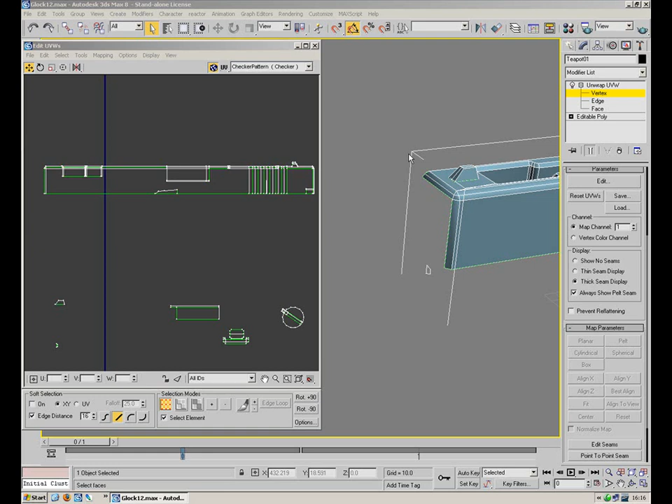So I'm just going to carry on from the last tutorial and finish off unwrapping this guy, hopefully. It's one of those annoying little projecty things you have to do. It always seems to take a lot longer than you expect.

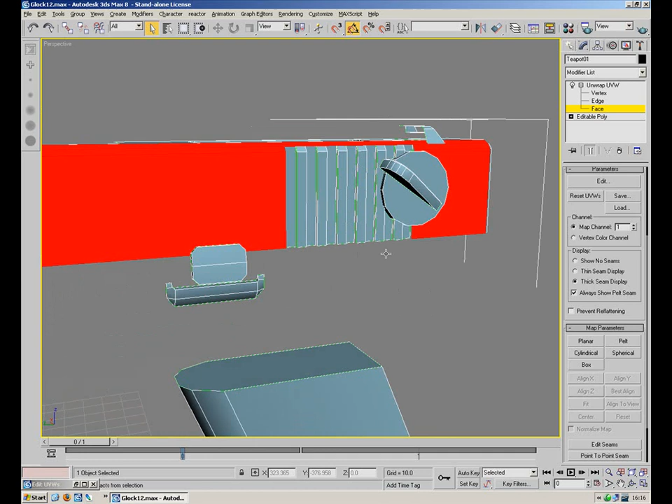I'm going to carry on unwrapping, starting by getting the slide out of the way. So I'm just going to select all the polygons down this side, and you guessed it, a planar map along the x-axis. You see I've missed out the little grippy section there.

I'm going to try and unwrap the actual main part of it first. Planar, we want Z, I believe. Going to need to rotate anti-clockwise 90 degrees.

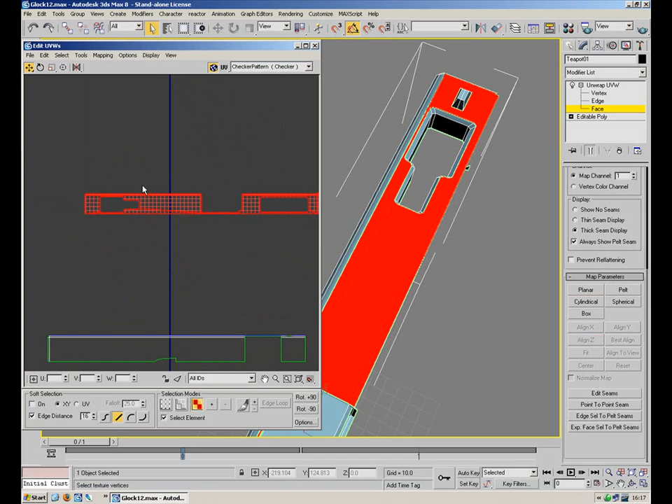Select this edge along the top, or the edges along the top, and we're going to do the stitch. Okay, we just need to do the front and back now, really. What are these guys doing?

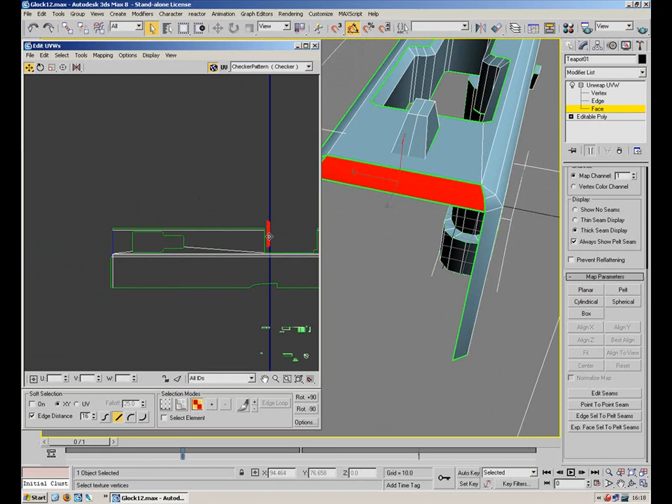Planar, Z-axis as well. We want to rotate 90 degrees and just bung these on the top, the front here where they're meant to go. Tool, stitch. Yes. Last but not least, we just want to do this small section on the back here.

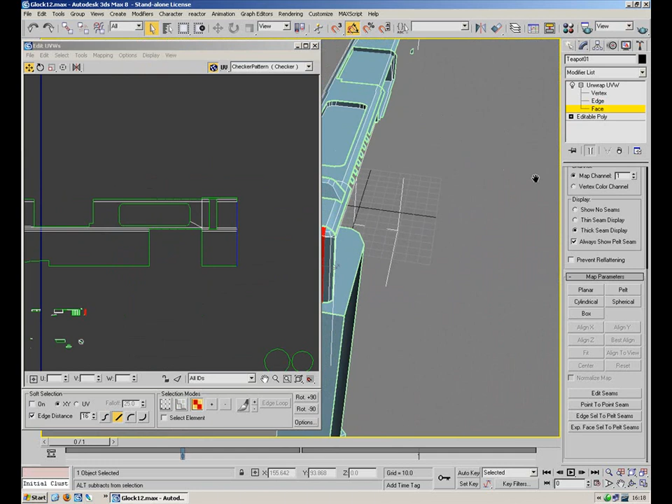I've always been a bit annoyed with Max that it doesn't have a hide polygon tool inside the actual UV map editor, because it's a right pain in the bum seeing what you have and haven't unwrapped. It's silly, really. The best thing would be to unwrap something, hide it, unwrap something, hide it, but my lovely friends at Autodesk don't seem to want to add that feature.

So I've just unwrapped that section at the back with another planar map and attached it on. That's sort of the main section there.

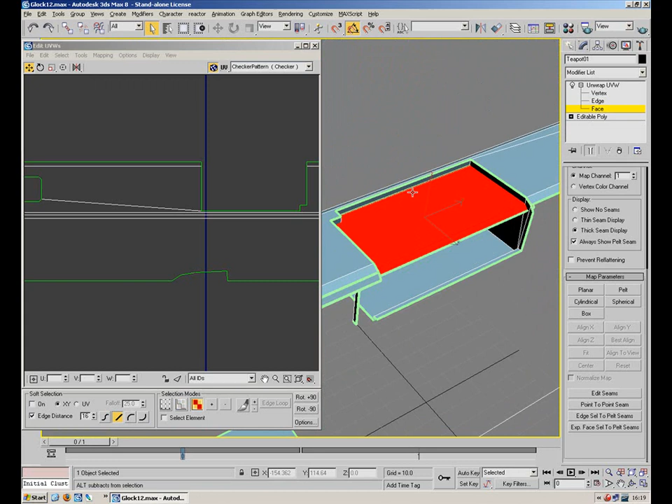I think I'll probably get this. Kind of lost where I am, I just had a phone call. I think I was just unwrapping this little section at the top, wasn't I? So I'll just carry on with that.

To be honest, by now I'm hoping you probably know what to do. It's all just a matter of planar maps, planar map this, planar map that. There's that last little section in there.

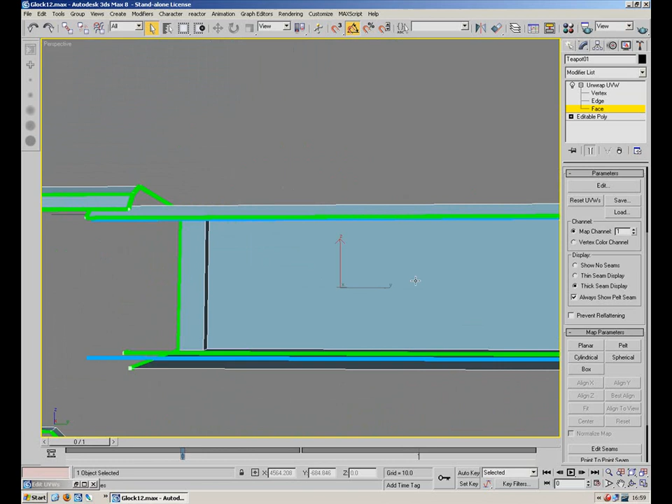Yes, that is the right edge. Right. I'm trying to figure out what's the top and what's bottom. That's the top. I'm going to rotate this like so.

Sometimes it can be quite hard to tell what you have and haven't got selected, but I generally use the viewport. You get your little XYZ gizmo there. I'll select these two verts, move over here, so I'm guessing it's those two verts rather than those two verts. So it's these two sections that line up over here.

I'm not going to attach them together or anything because they're not attached. I'm just going to go through and unwrap this last little section.

Also going to save it quick because, as I said before, it's not nice having to re-unwrap things. I'm sure there's a lot of people out there that know how to unwrap and know what I mean. When things break, having to start this boring process again, you want to pull out your hair, cry like a girl, throw your computer out the window, smash it with a hammer, and say grrr, grrr. Shit.

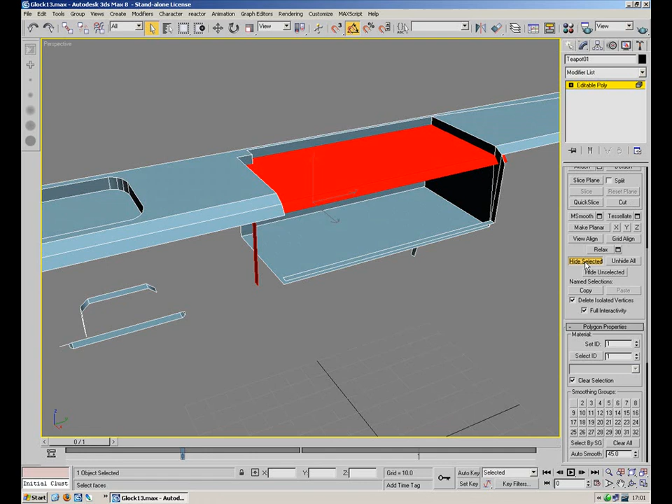Right. What I want to do is just get rid of this little section. So I'm going to collapse, select this element, hide selected, which gives me better access to this small inside section. Select them on the unwrap modifier once again, and just get going, getting this section out of the way.

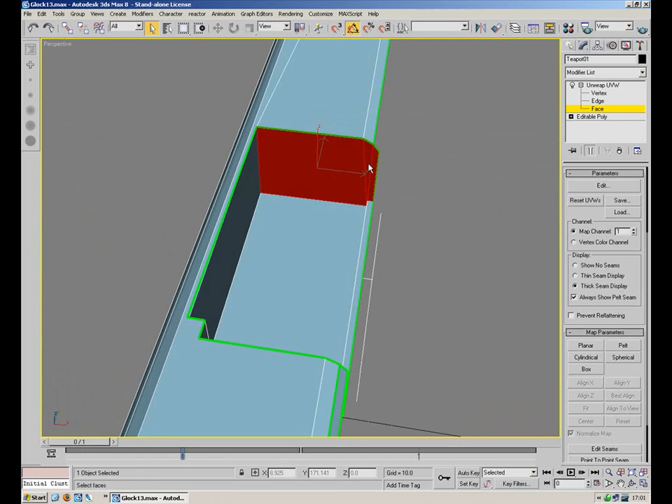Oh, forgot to turn off the normalised map.

So yeah, I'm just doing exactly what I've been doing the whole time, just going through, unwrapping every little section bit by bit. And I'm going to carry on doing that till every little bit has been unwrapped. Every little bit.

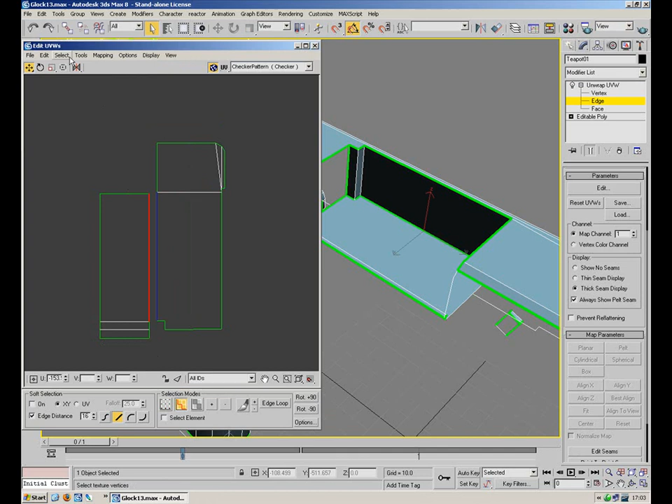I'm really trying to half rush through this now because I think you've had a good idea, but I don't really want to skip anything out in these tutorials. The whole idea is that I was going to do everything from start to finish and let people watch, because I'm sure there's a lot of people out there that know how to unwrap and who are sitting watching this thinking I'm doing it all wrong or absolutely bored out of their nuts. But I also know there's probably quite a lot of people that don't know how to do this and are perhaps learning something.

But where's that going? I'm hoping that if you do know how to do this, you're probably not sitting watching it, you've probably skipped on to another tutorial, and therefore probably wouldn't have heard me say that. But if you are a noob at unwrapping, I hope you're getting a bit of insight into how it's done.

This is to say you can see why it's quite good deleting half of your geometry, because you only really have to unwrap half as much, which of course saves you quite a fair bit of time, because as you can see this takes quite a while to do.

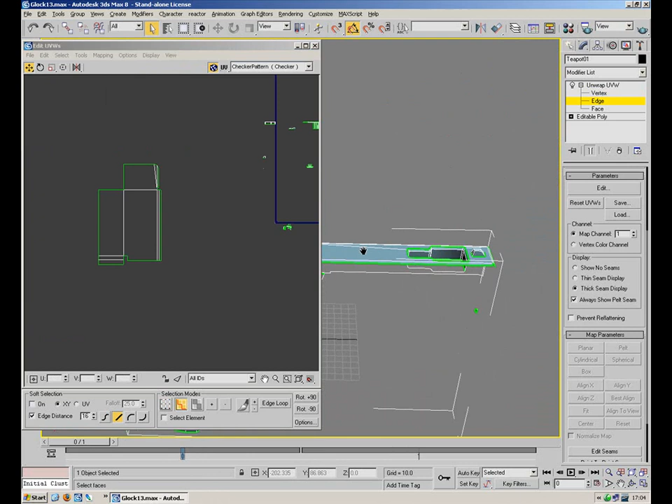I'm just hoping I don't have to do this in 3 tutorials. Can't say I've ever unwrapped a bit of grip like this. Trying to figure out the best way of doing it.

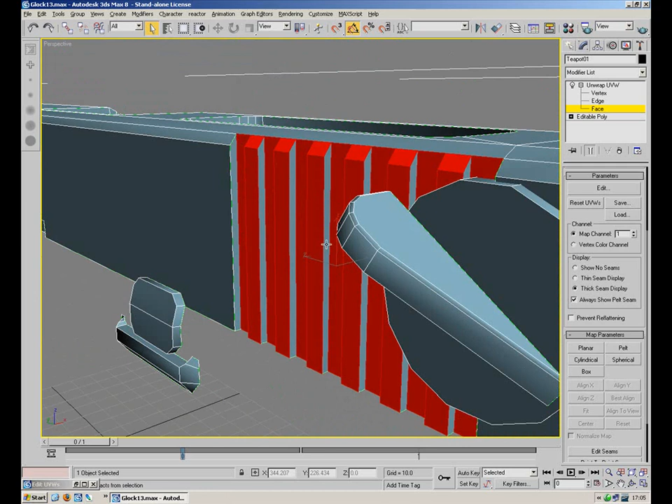I think what I'm going to do is just only map this, like so. Just going to scale these together a touch because I'm just a little bit messy.

And what I do want to do is just select all of these, right click and hit break to detach them off of the geometry, which I'd selected. Wait, actually let me explain that better. If I can undo it.

You can see how this polygon is attached to this polygon at the top here. This polygon here is moving with the movement of the one I have selected. I don't want that to happen. I know it's going to be the same on all of these. So what I'm going to do is right click while having them selected and just hit break. That should sort out that problem.

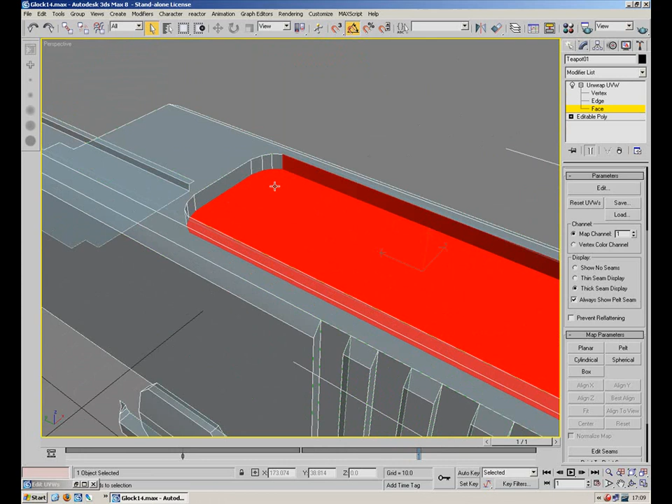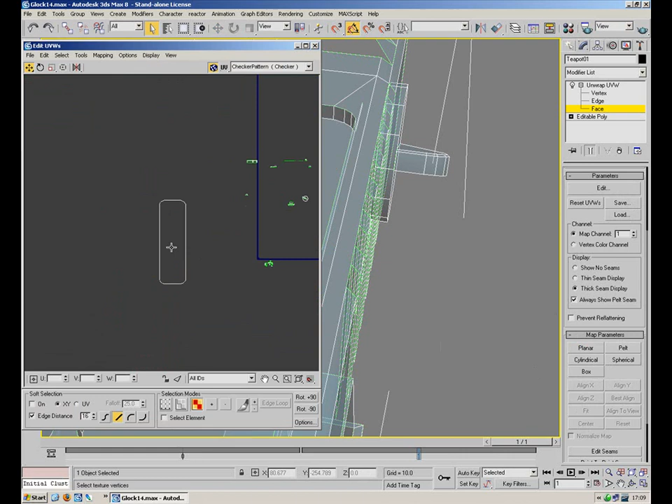To unwrap this section, what I'm going to do is be very lazy. I'm just going to select all of it, and I'm going to unwrap along the Z-axis, so straight down, like so. And then I'm just going to select the one large polygon in the middle.

I'm just going to scale it in, also a little slight uniform scale. That will do. Also just going to basically fill in this top little hole where it originally came from, like so.

That little section there is this little slidey bit there. It's planar. Then I'm going to do the Z-axis and just have a fiddle about. I may be able to unwrap all of it.

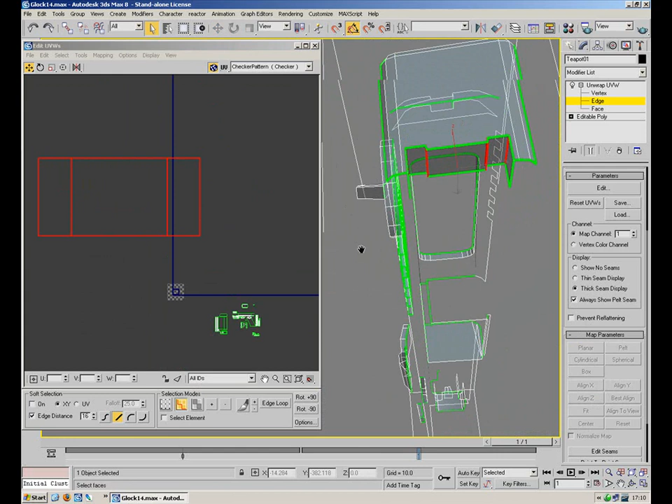So I'm going to select these two edges at the bottom. Just going to pull it out with my scale tool. I'm going to select this polygon in the middle here and pull it in with my uniform scale tool. That's that done.

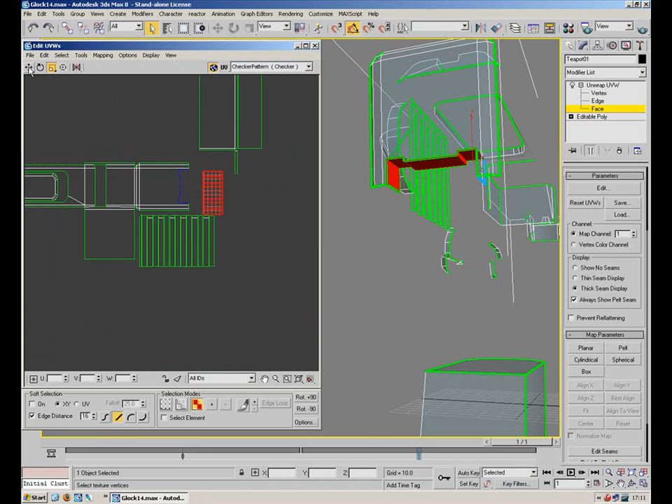Quick twist around, chuck it on top. I think that's the front sight. Right, I'm going to map and flatten map. Slam OK.

Right, I want both of these sections to be directly on top of each other, so I've put on my snap to grid tool. Put those both on top of each other. What's this? Front and back. Okay, I'm going to put both of these on top of each other as well. And that's the top.

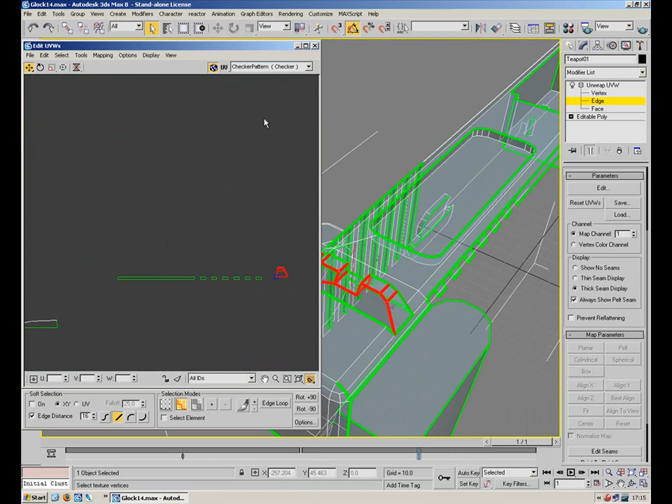That's that done as well. So just going to go through and do this back sight as well. Tools, flatten mapping, OK.

From what we're left, we're just going to go through and give it a bit of a rearrange. Oh, the front's been deleted, isn't it? Yes. Oh, that's not very good. I don't like that. Oh. Scale down, scale down, scale down.

Want these to overlap each other, and to conform onto there. In fact, I believe I've done that a little bit wrong. Needs me to be rotated round. Now, oh, something's going a little wrong here. Show no seams. Alright.

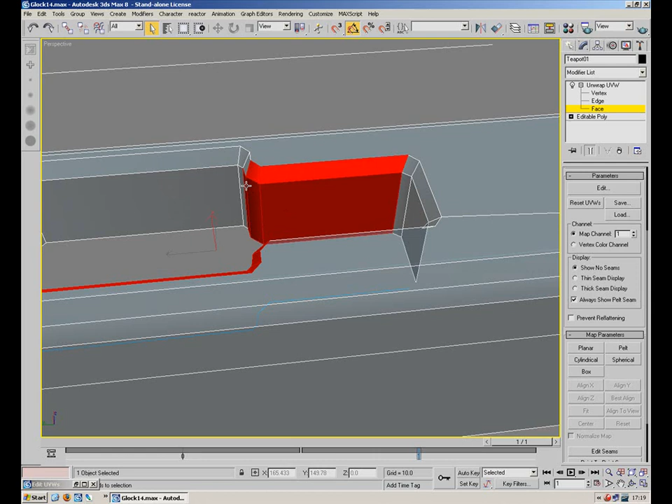I want to get this little section out of the way. I'm just going to select all this stuff on the side here, do a planar map on the X side, and then just go through and stretch out all the polygons.

Can't imagine this is the cleanest way of doing it, but I just want to get this out of the way now. I'm sure people are probably bored of my voice.

I'm going to put the checker on. It's a bit hard to see. Let's go align everything using the old uniform scale.

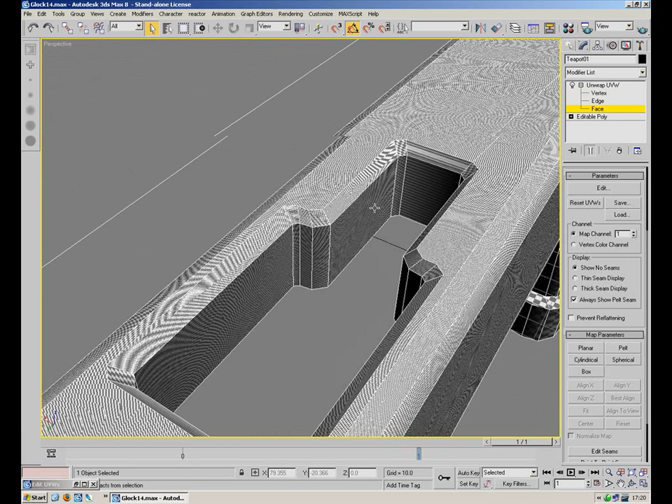Excuse me. I just need to do the front and back as well now. Just going to select the edges, select the front and back. When we unwrap that, we'll have two different elements in our unwrap.

Just going to drag them over here. There we go. Untick the elements. Just going to use my uniform scale to scale them correctly.

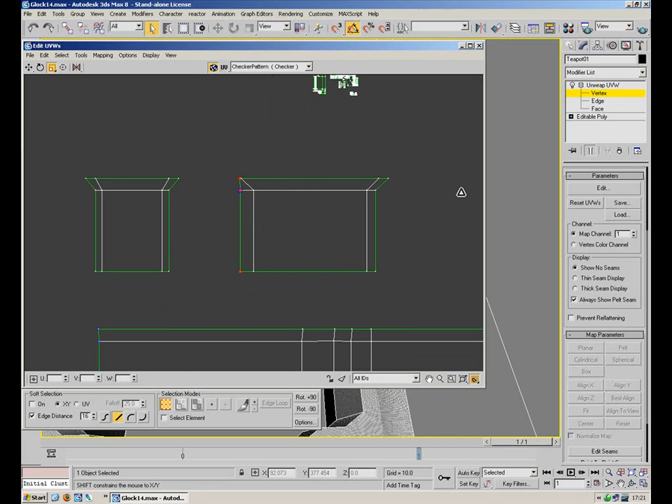Oh, I need that tool. All this scaling lot takes absolutely ages.

Alright, so you just want to stitch the selected.

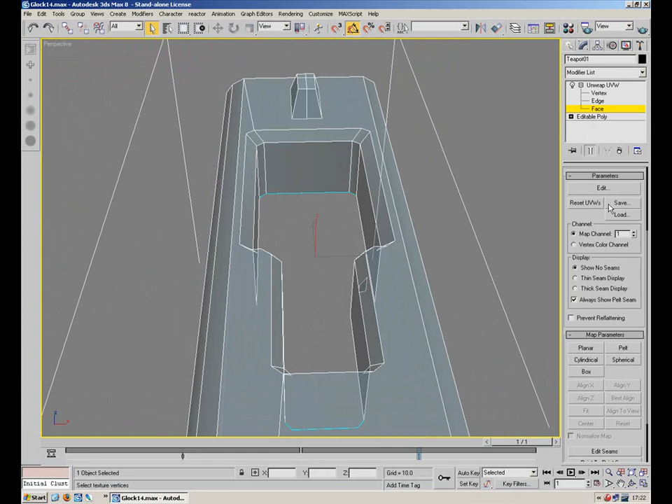Or is this the back, I think? Edge... there we go. Tools, stitch selected. Nice. Cancel. Tools, stitch selected. There we go.

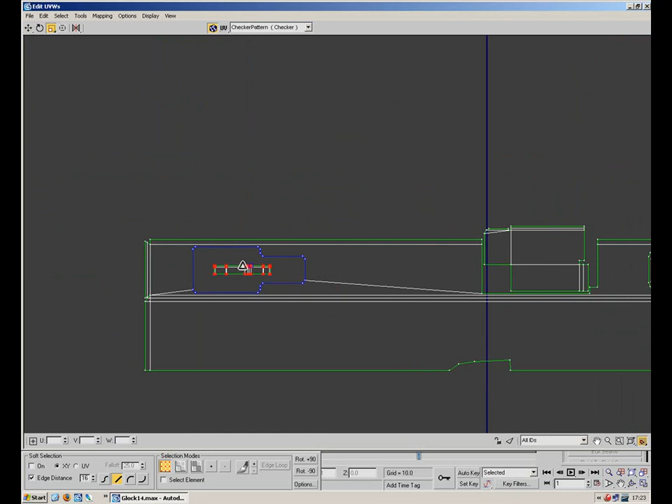I'm sure I'm not the only person in the world that has a love-hate relationship with this program. One minute it wants to be your friend, and then the next minute it hates you. And damn, it hates you with a passion. I mean, it's not me. It's obviously not me doing anything wrong. It's all the tools.

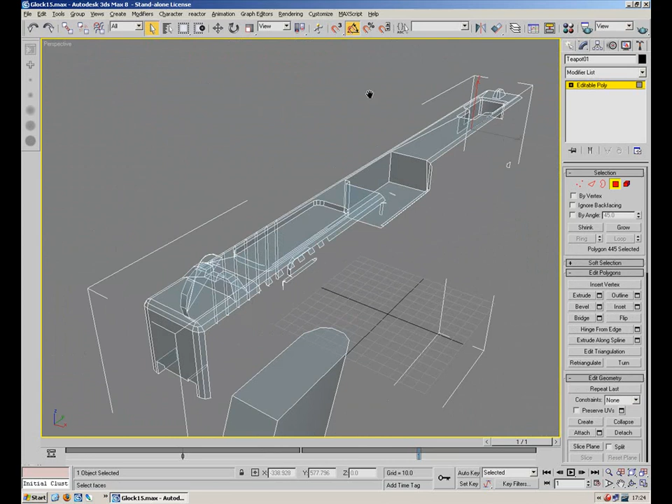Alright, what I'm going to do, I'm just going to collapse the mesh again. Yes, save. And I'm going to just go through and delete some more of these edges that I don't want, i.e. I can't be bothered to unwrap. Delete.

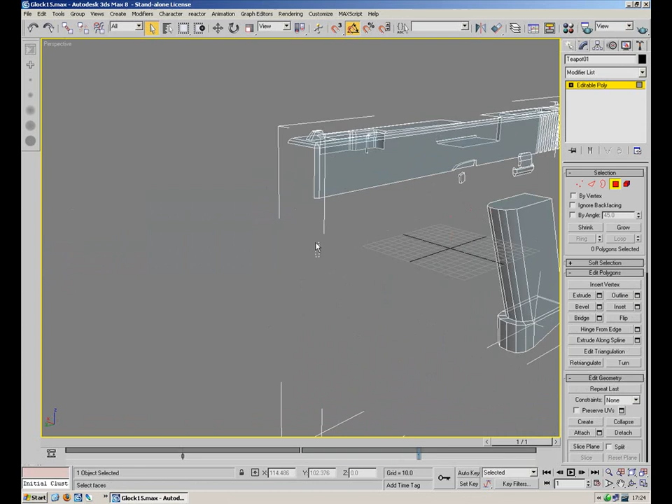Again, I don't think they're really going to be seen from this position here. Oh, also got that edge polygon here to get rid of. There we go.

So just going to try and rush through those last little bits. Put the unwrap modifier back on. Edit. Slight rearrange up here.

Shrink them down a bit. In fact, I think I might actually stick it in this gap just here that we've got. Make the best use of this space as we can, as always.

Scale that out for a minute so I can see it. Alright, so last couple of bits. Mapping, flatten map, yes please. Fit that there.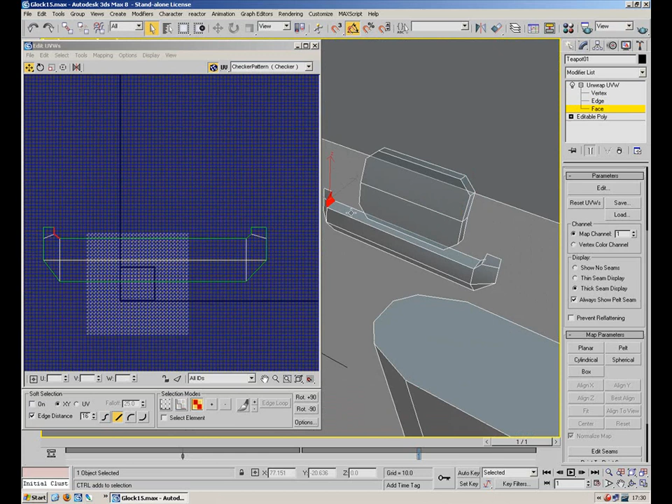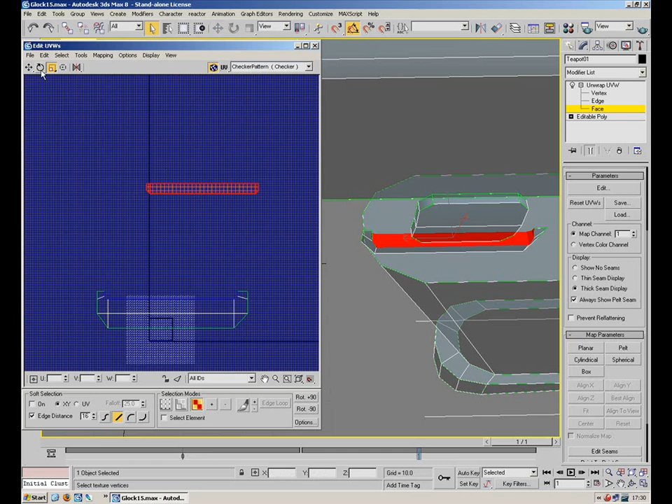I really hope people are skipping these tutorials, because they are a little bit boring. I'm hoping by now you've got some kind of good idea about what the hell I'm actually doing. The main thing you're going to want really is just the actual final bit, which is just arranging everything on the map, really.

Last little section, this guy. Planar, best align. Right, that is a stupid way of lining it.

So I'm just going to look down from on top of it. I'm going to do... I'll try align to view, see what that comes out like. Probably a little bit of a mess, really.

Okay, it's not too bad, but what I'm going to do is target weld. I basically plonk the vert right on top of each other. Like so.

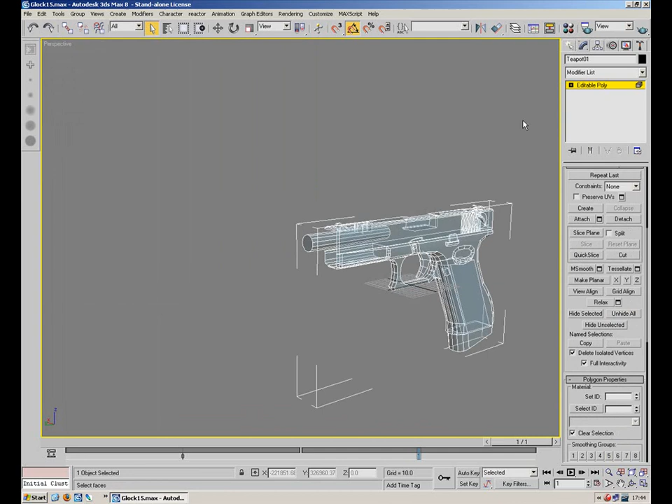Right, so I'm just going to collapse the mesh, yes, and the element select, I'm just going to unhide all. And what I want to do is just delete this polygon down the back here, because that isn't needed. And then I'm just going to put the unwrap modifier on again, edit, and that circle that was just there has disappeared, and I'm just going to replace it with this guy here.

In fact, what I think I'm going to do is scale this one down. I'm just going to move these two around, because this one deserves to be a little bit bigger. It's going to be seen, whereas the other one isn't.

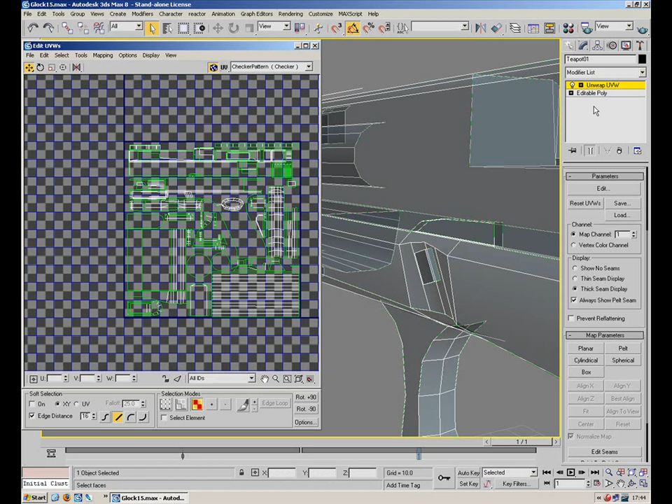Right, I think that's about it, really. I might have a fiddle about off camera, but it's just a matter of arranging your UVs to fit in as snugly as you can, using up as much space as you can. I don't think that's too bad.

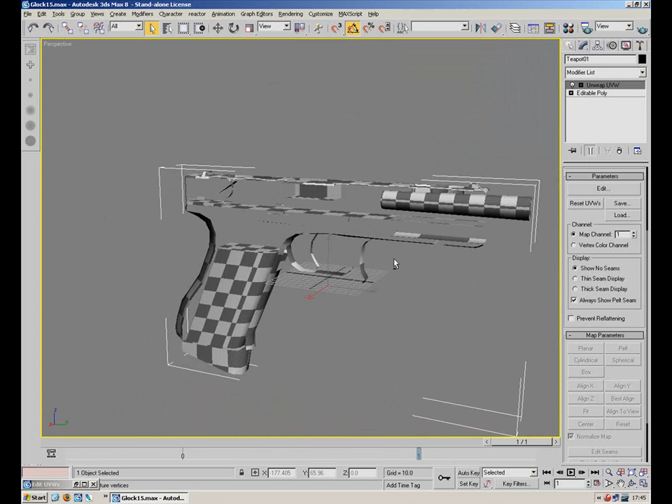I'm also going to put the checker on. Oh, what's happened there? There we go, so that is our model unwrapped and ready to be textured. And I'll be bringing this into Photoshop in the next tutorial. Have fun.